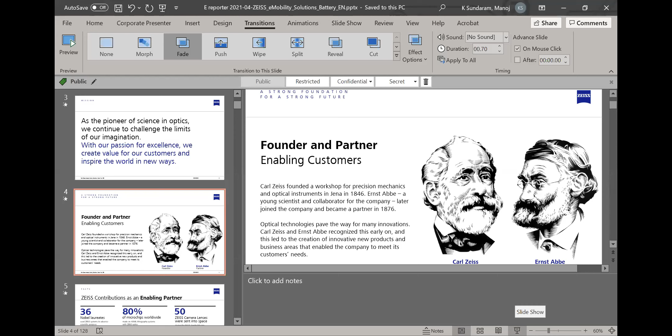Oh, it's not moving forward. Sorry, I do not know, it was working very fine in the start. Try once again, or you want to share the complete screen, or advanced or something. Manoj, you could also send across the presentation to us, to Priyakshi on WhatsApp, and I'll put it on for you and change the slides for you. Is it okay now? Yeah, okay, it's fine now.

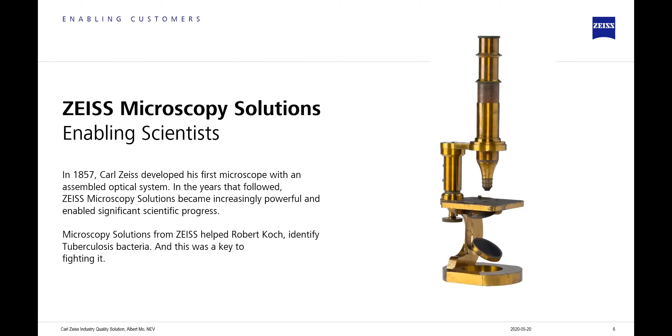We are an enabling partner to many renowned companies for many years. One shade of it is that 80% of the microchips, be it mobile phones or USB cards or anything, is made on Zeiss optics and Zeiss technology. One of the key inventions when tuberculosis bacteria was spreading around was this microscope, which is valid even today in corona times, and also for lithium battery solutions. A lot of innovators have used our tools to make their processes better and figure out new things.

We are a worldwide company, present in about 100 locations. Our headquarters is in Germany, and we are located in 50 countries. 13% of our revenue goes back into R&D, which is one reason we say we are at the leading edge of technology.

We are divided into 4 verticals. The vertical I belong to is industrial quality and research, and our solutions come out of this vertical. In India, we are about 22 years old as a direct subsidiary, and we have a manufacturing facility for eyeglasses, for CMMs, that is coordinate measuring machines, and we have an R&D facility also. We are about a 600-member company in India.

This is our office, headquartered in Bangalore. We cater to medical, industrial technology, microscopy, vision care, and sports optics.

This slide is one of the most important, I would say, a message to the audience here, the august audience from the lithium battery area. This is one of our competence centers in Bangalore, about a 10,000 square feet competence center with various technologies, which I will showcase in the next slides. All these technologies are available at Bangalore, Pune, Chennai, New Delhi, Coimbatore, and various locations where you can come and do a pay-per-use, walk in and use the machines on a payment basis depending on the technology. We can give you a lot of solutions for the battery components, very clearly linking with Mr. Chandrasekhar's presentation on the microstructure, chemical porosity, and so on.

Our presentation on the battery topic starts from the overview until battery tray production, but because of paucity of time, I will cover only a few topics. Our overview stems into two topics: one is battery material, the ones needed for R&D, which is recipe development, the most important phase in the battery. Then it moves on to production. Mr. Chandrasekhar covered raw material processing, electrode production, and cell assembly, so I will also move in that direction, starting with point number 4, raw material processing and making a cell. This will mostly be the topic that starts in India as the lithium battery discussion explodes.

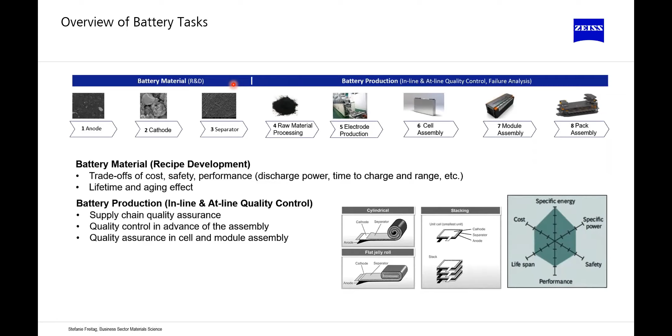So we will move forward to quality assurance solutions when you want to produce an electrode. Similar to the previous presentation, you have incoming goods, you blend them into a slurry, then coat and dry them, do a calendering process, and then cut the electrodes.

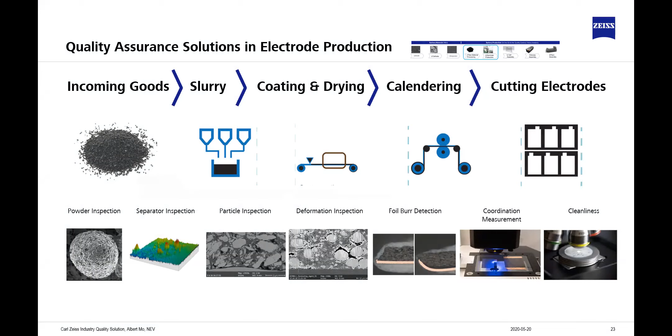In this process, you need to inspect, starting with the powder, separator, particle homogeneity, then understand the deformation, then the foil burr once you cut it, and also the dimensions. Starting with the process, we look at cleanliness, raw material inspection, checking the separator, which is a porous layer.

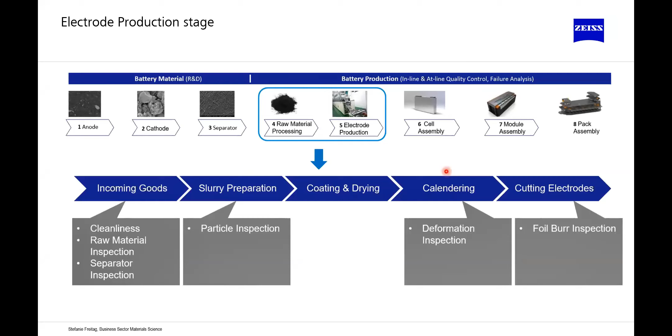In the slurry preparation, you look at the homogeneity. Then in the calendering function, you look at what kind of pressure to be applied and what kind of deformation happens in the electrode material you have pasted in. And then finally, you cut the electrodes.

So first is technical cleanliness. We do have a lot of solutions. We are a microscopy company. We have solutions starting with simple stereo microscopes used for identifying particles of around 20 microns, going up to identifying particles in the range of nanometers, few nanometers.

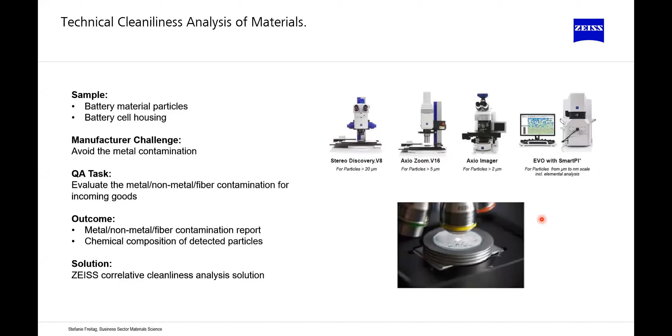So the major task here is actually to avoid metal contamination. You must check your incoming raw materials for singular metal and ensure no inclusions of non-metal or metal or fiber contamination in the incoming goods.

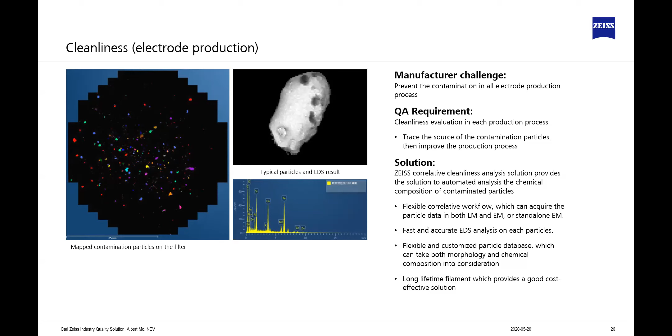We have complete cleanliness solutions. You can identify contamination either from the particle or from the prepared electrodes. You can check for contamination, identify them, look at where the contaminant is coming from, look at what metal is the contaminant, and then go back and see which manufacturing process might be inducing this metal into your process. So this is an important factor.

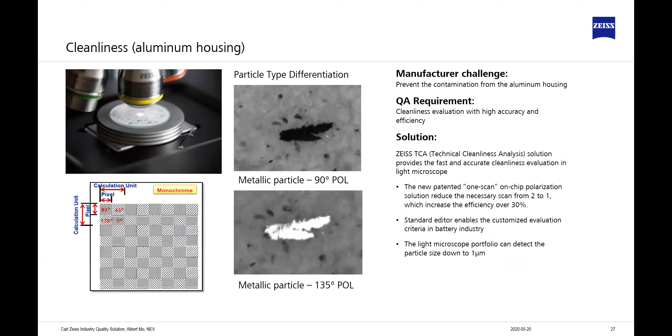Also, the housings are also important, where you have to check for cleanliness. There are procedures, ISO standards, which have been laid out, and our software follows it to the T. So you can be sure of getting the right solutions from us.

Raw material inspection, this topic was also touched upon in the previous presentation. That is nickel, cobalt, manganese 111 or 811. The technologies keep changing, so you must have a clear cathode raw material quality assurance process in place, for which you need a complete solution stream, glove box, vacuum box, and so on and so forth.

We have these solution spaces available. Even if you do not manufacture, we can give you the complete stream, complete flow of operation to check your raw material.

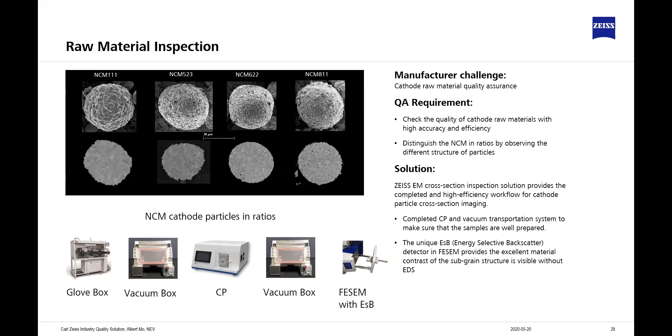Separator is again a polymer material, very important to understand to improve the performance. So the separator material requires a different treatment. It requires some electron microscopy to look at the microstructure. This is another role what we play.

We have different microscopes to look at the heights of the separator material and how it bonds with the PVDF material, which is another layer, a binder layer.

Slurry, as you make the slurry to coat, then you must understand how the powders are homogeneous without breaking the particles. You could do it in simple microscopes, or you might need the help of some electron microscopy. This is also available, and in some very high-end battery manufacturing companies, these things are automated, and our electron microscope could be automated to pick up the data, thereby controlling your process in a more effective way.

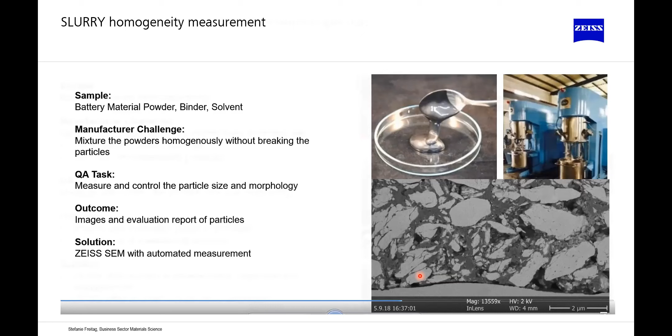Now, coming to calendering, that is once you pressurize the slurry on the aluminum or the copper foil and try to make it as thin as possible. In this case, you have to look at the homogeneity, the particle size, the morphology, and what kind of pressure you should apply.

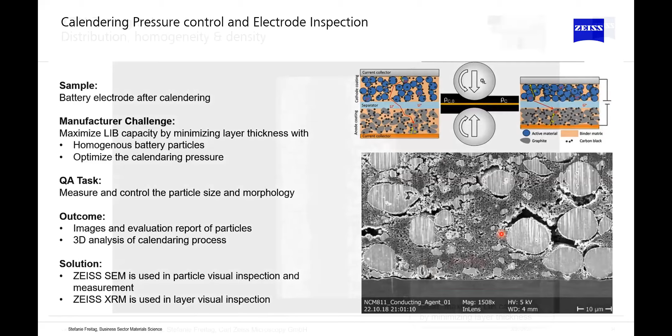So here again, we have solutions, Zeiss scanning electron microscope, or even XRM. There is another level of technique you can use. So you have two techniques we can use to tell you how good is your electrode. This is one of the technologies I just want to showcase.

You are now looking at two electrodes. One on the left is a highly compacted one. On the right is a semi-compacted one, depending on the pressure applied in the process.

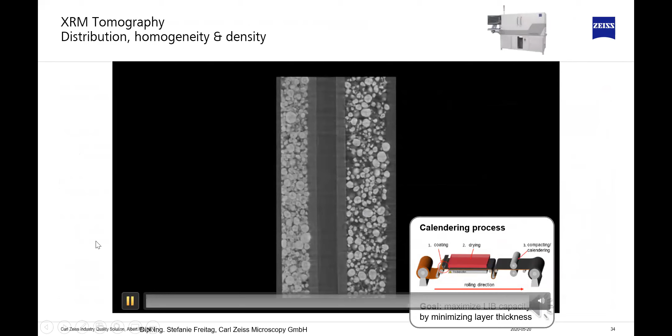Now, one of our machines, shown in the right top corner, can get into your electrode in detail, layer by layer, and you could understand how is the homogeneity of your material. Is there any foreign layer? Is the material compressed enough, or are there lots of voids and spaces? You could look at it.

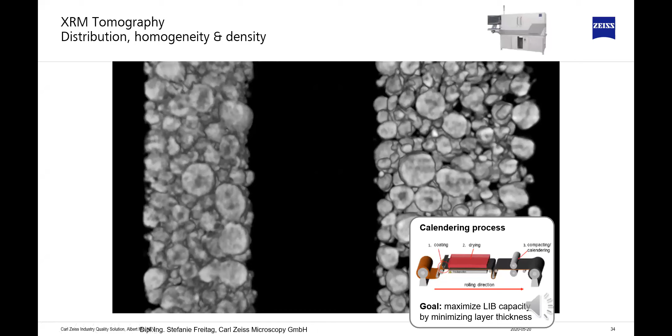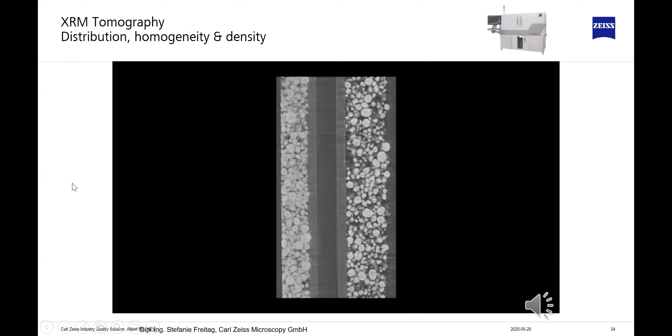This is actually amazing that you can go into the material and look, because this is an X-ray microscope. You X-ray the material and then you have an optical data collection. This is something which is very useful in the battery industry for taking a deep dive into the metals.

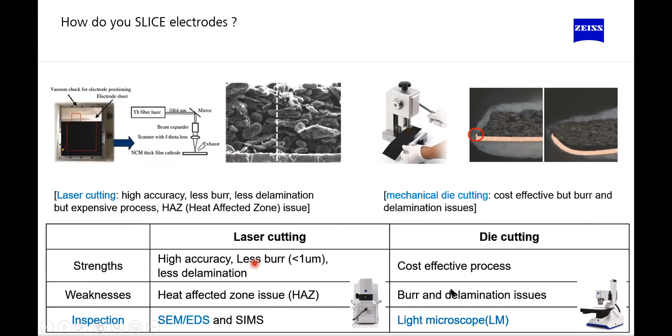Next, after you prepare it, then you have to slice it. You can slice it two ways: laser cutting or die cutting. Depending upon which technique you use, you have different microscopes to look at the end processes. You can use a very high-end electron microscope if you use laser cutting, or a light microscope.

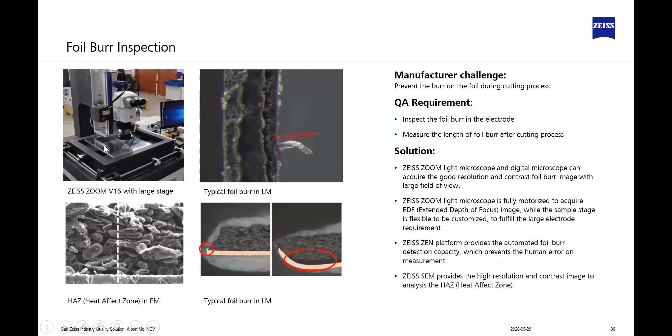We do have automatic solutions where our microscopes are put on large XY stages so that the complete layer of the electrode could be inspected for foil burr.

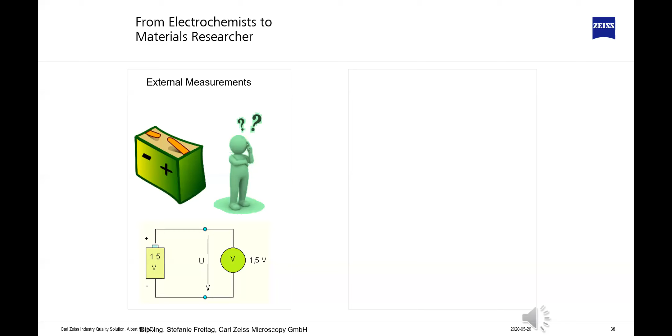So this was about the cell manufacturing process. Now you've assembled a cell, as was explained by Mr. Chandrasekhar. In the past, we were looking more at external measurements - the electrolysis, voltages, and current ratings and so on. Today, you would like to have a deep dive understanding of why the performance is good or bad, and the safety and recharge issues and so on.

So for this, once you make a cell, we have a beautiful novel technology called computed tomography. This is very similar to what is available in medical hospitals, where there is a CT scan. So this is a CT scan for industry, a 3D CT scan.

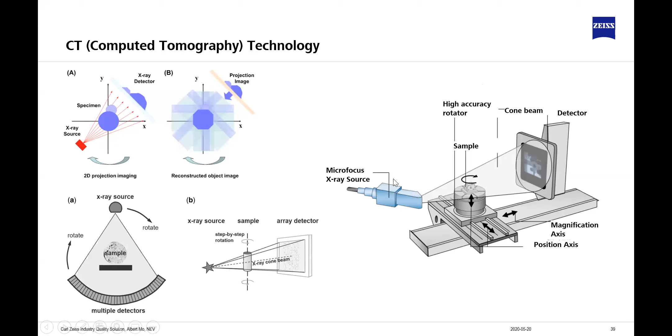So you have a source and a detector. You can put your battery, an 18650 battery, could be placed here. Then after about 30-40 minutes, depending on what you want, you would get a complete view of the battery material.

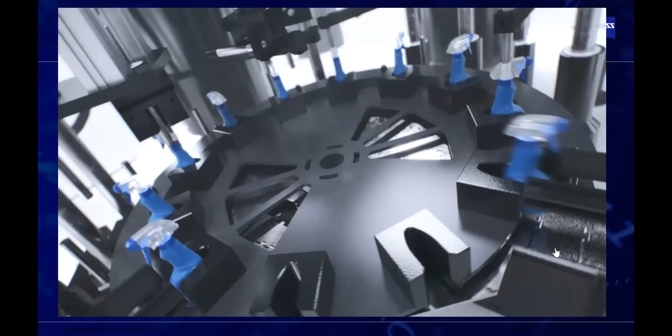So here I would like to show you a small video. In this video, we cannot show you a battery because of NDA and other regulations, so we are showing you a plastic component. But imagine this could be a battery in serial production - the same methodology is applicable.

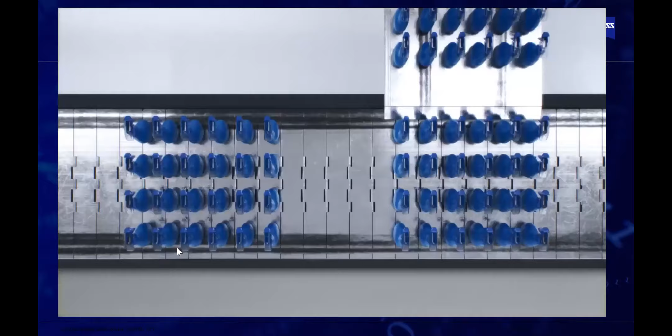In a serial production of batteries, if you would like to inspect a batch of batteries, you could inspect it from the outside - that's easily possible. But there are a lot of defects inside the battery. As explained in the previous process, there's a lot which happens inside the can - welding, tab welding, and so on. So there are a lot of internal defects which will remain hidden unless you inspect it and understand your process. X-raying your part is the only way to get the full picture.

And it is now easier. It's available in Bangalore, it's available in Pune, and it's going to be available in Chennai. So please come to us if you want to inspect your batteries.

We will put it inside a machine, a small machine which is available with us, an X-ray machine, which will go into the battery and detect - it's called Metrotom. It's a simplicity in CT. CT is computed tomography technology. So this would go deep inside your part. We will see in upcoming slides.

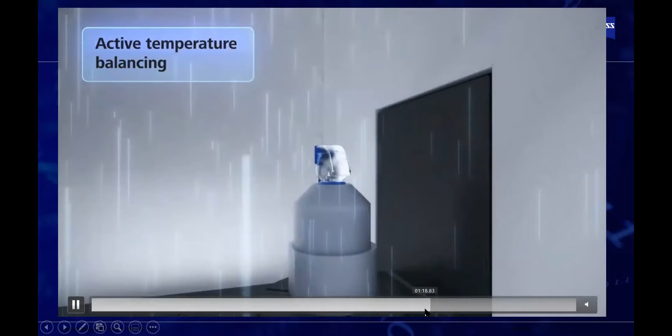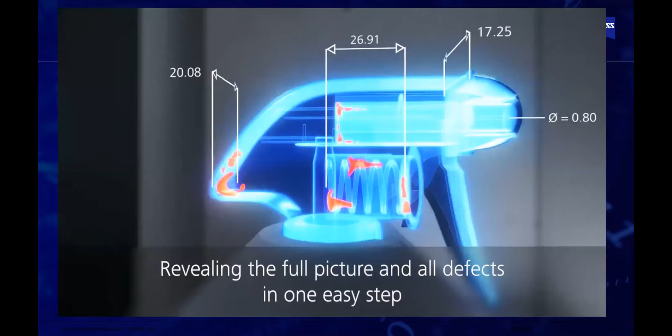You can measure inside the part. You can measure your cell structure. You can measure the wall thickness of the electrodes. You can measure used parts without dismantling them. It's a non-destructive test - a very interesting test, and many battery companies are using this technology.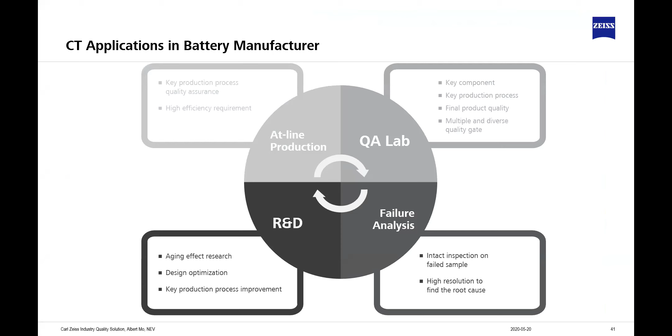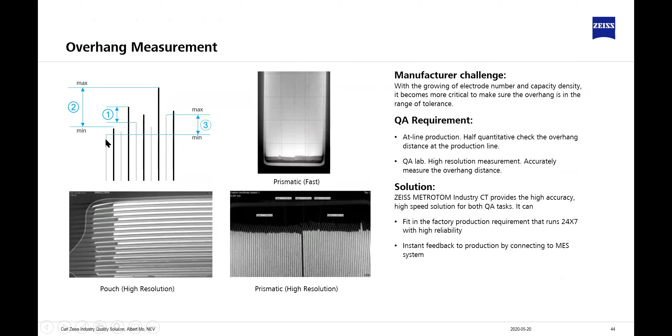Aluminum housing, if it is impinging on your electrodes, you could look at that. Tab and welding defects and glue inspection can be seen in detail, as mentioned here. You can measure the electrode to electrode heights, and measure the maximum to minimum heights, so you understand what's going on inside.

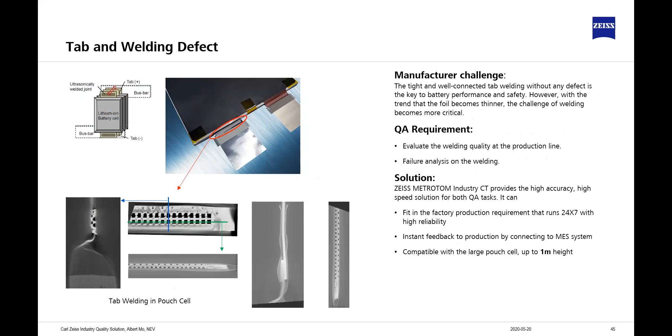Pouch cells again have a lot of tabs which come out and they are very fragile. The thickness of the tabs, the foil collectors, keeps getting reduced, and hence the welding is very important. The welding could go bad if the heat is more or less, so you must inspect the welding as a process, which you can do with our CT machine.

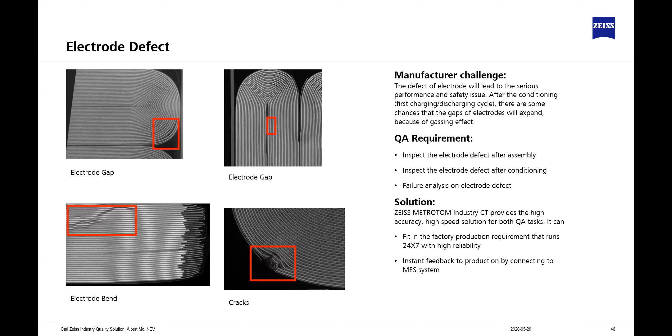Electrode defects. You have a canister, you have a battery, and you do not know why it is bad. So you want to put it in our machine, and you could find out that there is a crack in your jelly roll. This can be made out, and our engineers in Bangalore have done a lot of work for the battery companies. Please come talk to us and we could give you solutions.

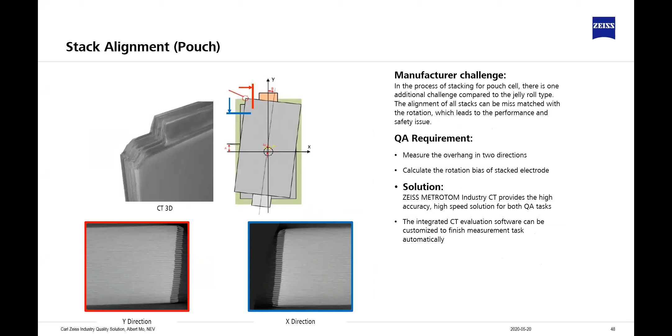Metal contamination, we discussed this. That's one of the major areas. In pouch cell stack alignments, the X, Y differences between the stack layers are important, which can be taken care of.

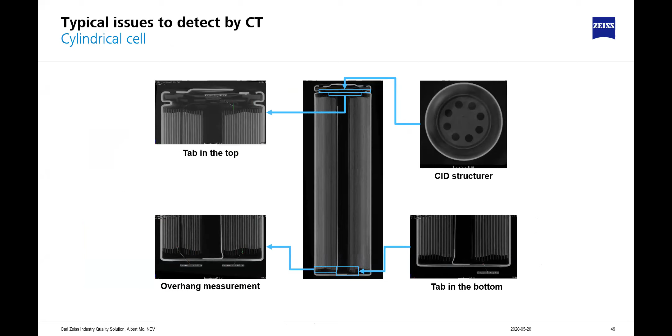Cylindrical cells, again, you can understand a lot by X-raying it and looking at it inside. I'm repeating, it's not an outside measurement. You're measuring inside the battery what's going on. You can look at it visually and also measure it.

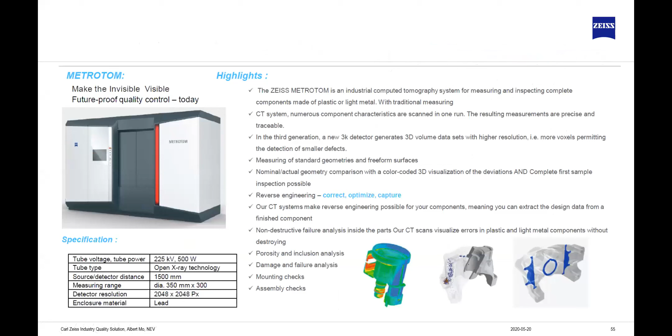Now I'll go back. After finishing electrode production, the quality topics around that, cell assembly and the topics around that, module assembly, I go back to battery material development. This is one of the major areas where we need to improve as a country.

Our experience at Zeiss, we have been in this field for a lot of years, and in the lithium battery area for about maybe 10 years or so. This whole presentation is a collage of our researchers who are sitting in China, Japan, Europe, Germany, and USA. So we have a lot of know-how.

We can help you with understanding and characterizing your material content, which will result in looking at your material structure, how the properties behave, how does the material behave, and finally what is your performance and how does your process work. So everything in a battery has to do with the microstructure.

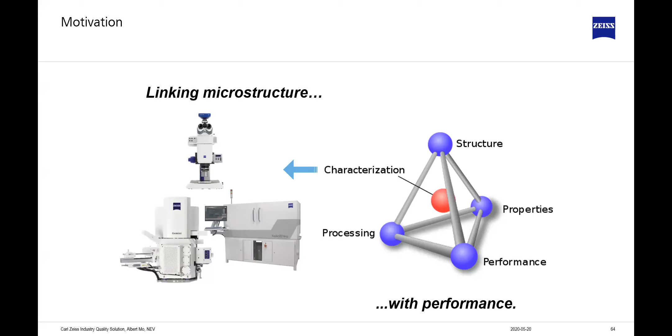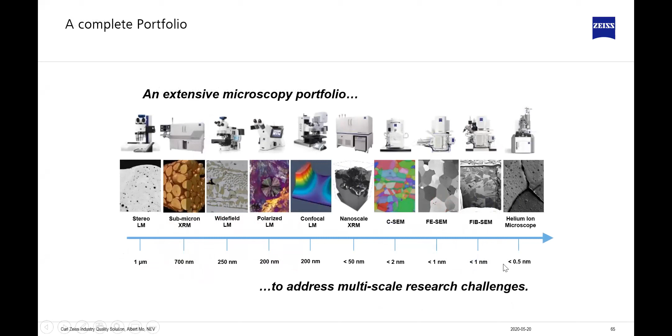So what we will do is, we now have an extensive microscopy portfolio, starting from a few microns of measurement down to a few nanometers, I repeat, a few nanometers. With this complete portfolio, we can understand the packaging, which we already saw, the assembly defects, the layer defects, and the porosity of the separator, going back to the particles.

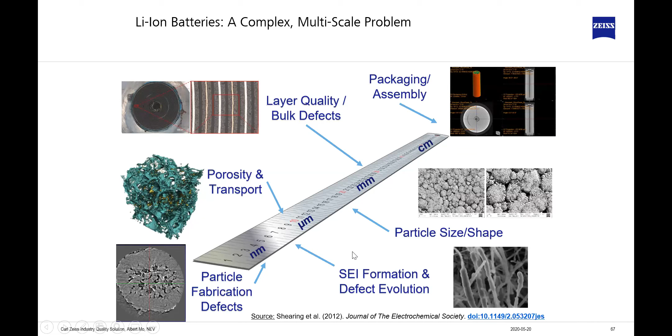We can look at the individual graphite particle. We could look at the SEI formation and see what is the thickness, and so on and so forth. We have a lot of tools to do it. Most of the tools you see here are available with us in India. That is the biggest part.

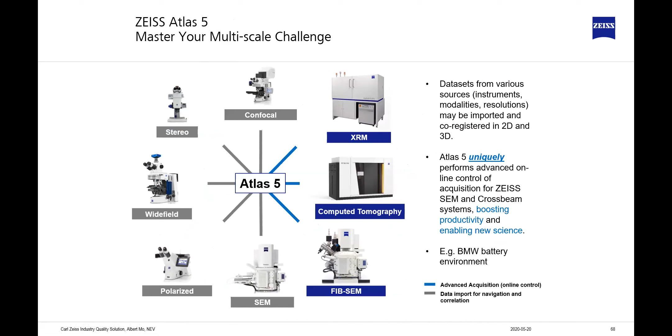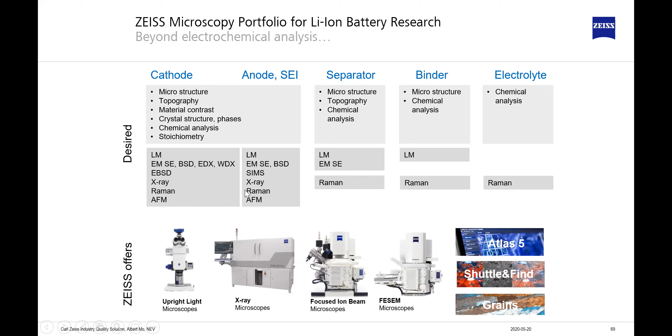Material contrast, then chemical analysis, and so on. What are the technologies? There are a lot of technologies used. We can explain all these things to you when we have our engineers together with us. Many technologies and many machines are available. We also provide you, as we discussed, a complete solution for how to handle lithium batteries.

Now we will talk about three topics: what you can do in a simple microscope, what you can do in an electron microscope, and what you can do in X-ray microscopy.

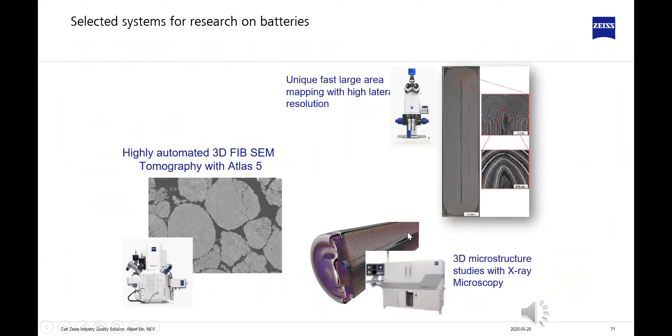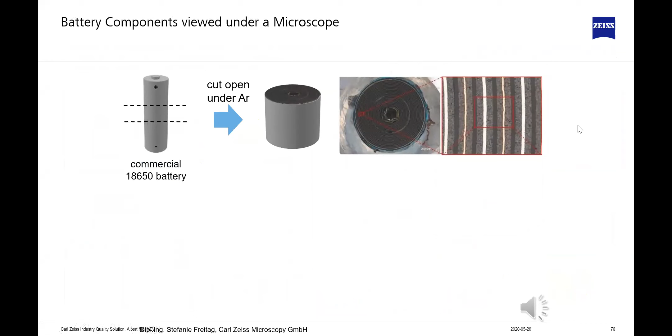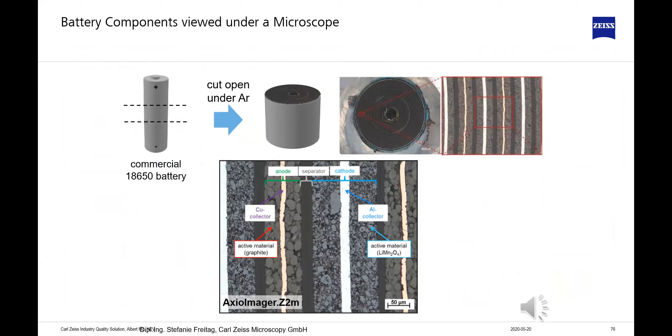In a simple microscope, you can cut open a battery and look at the layers. You will have to do a lot of polishing and processing work to prepare it for viewing. Then you can look at the individual layers: anode, cathode, separator, the copper and aluminum collectors, and the distances between them. This is another view showing how you can look at the layers.

So what can you find out? You can find out physical deformation and stress. This looks like a prismatic battery, so you can find deformation and stress in it. You can find if the particle size is not homogeneous, cracks, layer thickness, and short circuits. You can measure from a few microns and above.

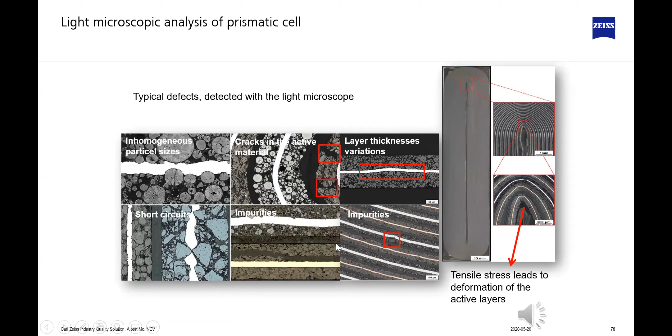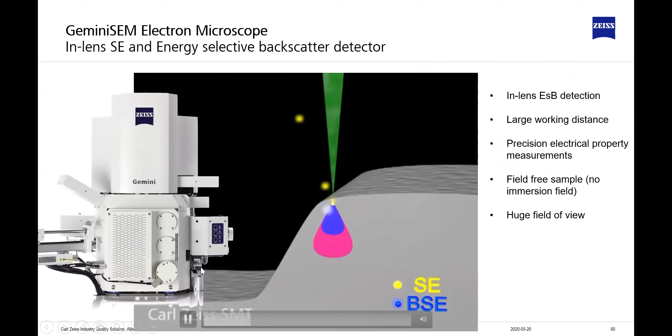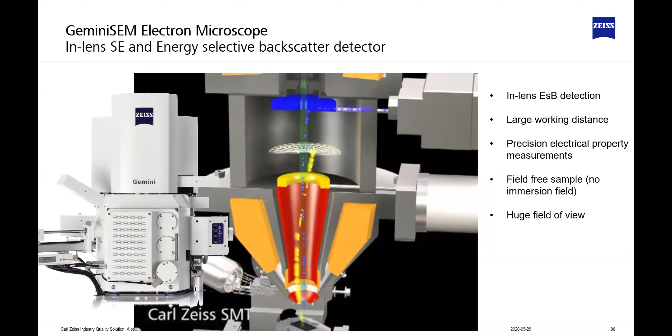Now going forward, if we use an electron microscope, what can you do? You take a small sample of the part, put it inside, and a stream of electrons impinges on the material. Then you get to know the microstructure of the material at a different scale altogether—we're talking about a few nanometers or tens of nanometers.

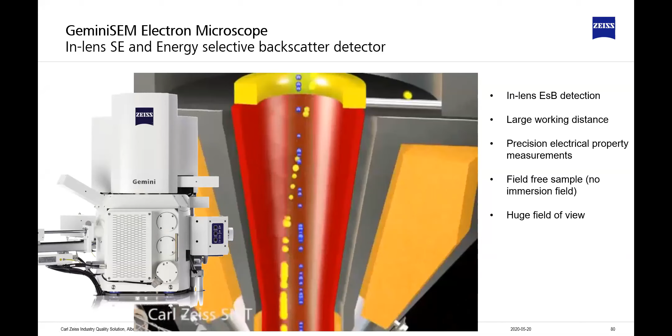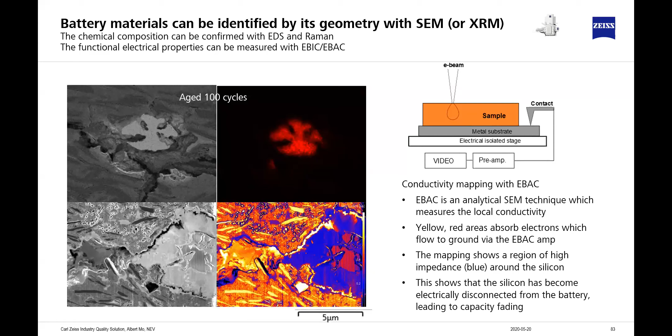This is an example of silicon, which is used in the graphite to improve the performance of the battery. You can look at the silicon and see how it swells after a few uses, so you can study the aging condition of the microstructure. After 100 or 200 cycles, what change happens? Which material changes, which material pushes what out? You can do all this in our electron microscope.

You can section it layer by layer and go deep inside. This is very important, and if India develops this kind of R&D, it would be very useful—otherwise we remain dependent on other countries for these developments.

Aging of the separator you can understand as a separate topic.

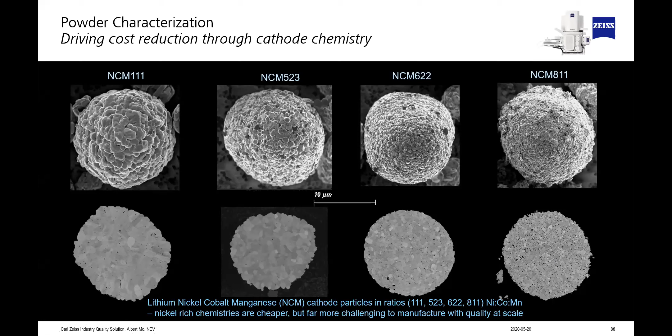So this is the level at which our machines can view the battery, from a particle to the complete battery or pack, or the complete cell. We can also view this with our technology.

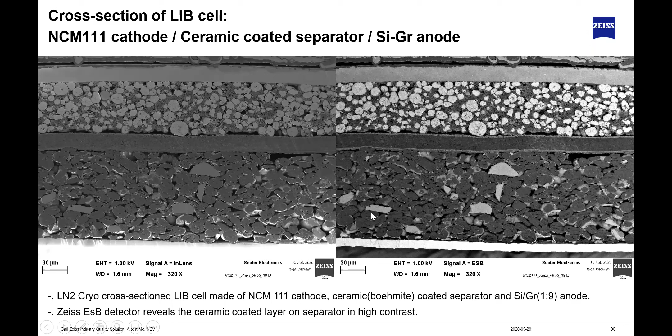You can view the polymer. To view this polymer, you need a very high-end, low-voltage technique, which is available with us. These are multiple views and images of a ceramic coated separator, and this is again an NCM 111 cathode, which is possible to view in our electron microscope.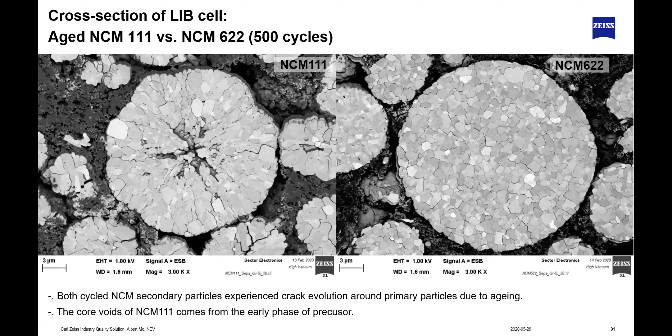Now assume you have made a battery and you want to view it without damaging it, going into the layers of it—we do have a technology for that. This is called Zeiss XRM, an X-ray microscope. The battery is put inside, and using this technology you can completely get the rendering of the battery as it is inside.

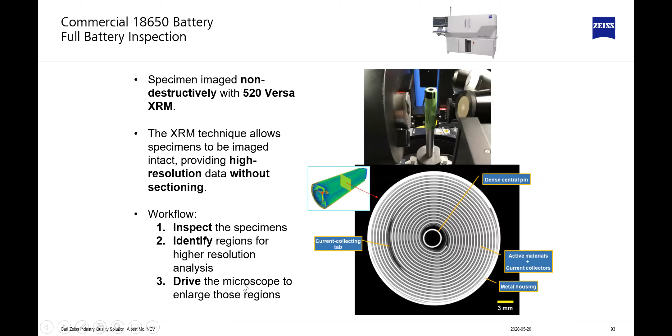So this is a physical rendering of it. I will show you a small video. What you can do is inspect the specimen of the battery, identify the regions which have issues, then analyze those regions separately. So this is what you would see.

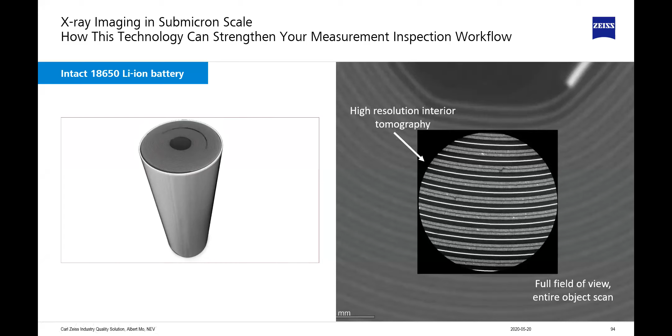If you can see the video on the left, that is a complete 18650 lithium-ion battery. You could go into it, you have the complete 3D structure. You can go into the battery, look at the individual anode, cathode separator layers, look for inclusions, cracks in them.

So this is fabulous, and this technology is available in India. As Mr. Chandrasekhar mentioned, we are related by our way of work to a lot of educational institutes who have this technology, and we can put them onto you, collaborate and support you in doing these things.

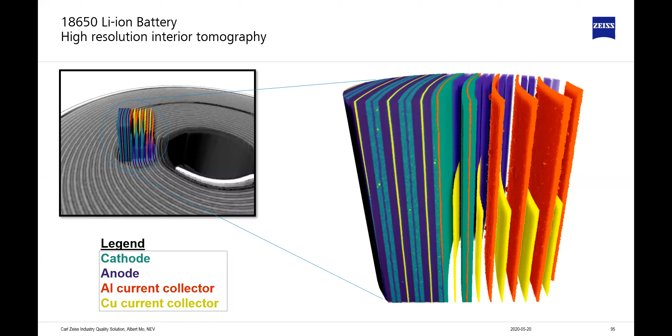This is a detailed analysis, about 500 by 500, 0.5 millimeters by 0.5 millimeter diameter. You look at it, then look at a small area in an electron microscope. This is the layer. Then you keep magnifying it, and go to a real fundamental secondary or primary particles and see how things are working.

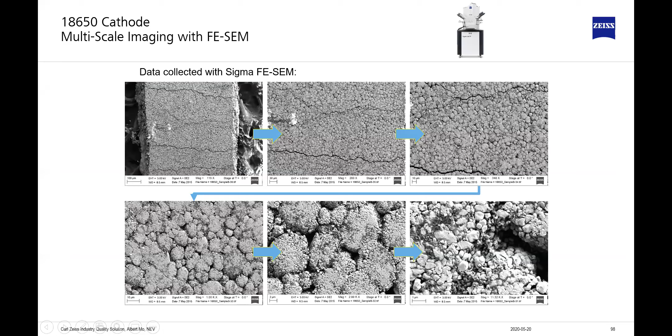And you can see a lot of cavities and spaces which do not add value to your battery performance. Coin cells, you can go inside and look at what's going on. Another view of the same machine.

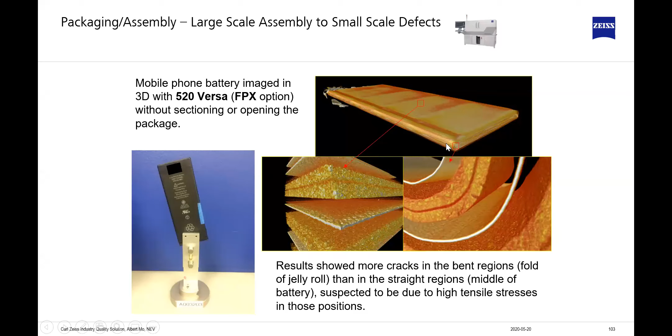This is called an X-ray microscopy machine. Another view of the pouch cells, what you can do by putting it inside the XRM. So you can see this is an example in a pouch cell. In the flat areas, things are fine. But when it comes to the areas where it is getting bent, you can see the cracks. Cracks mean low performance and failure of the battery.

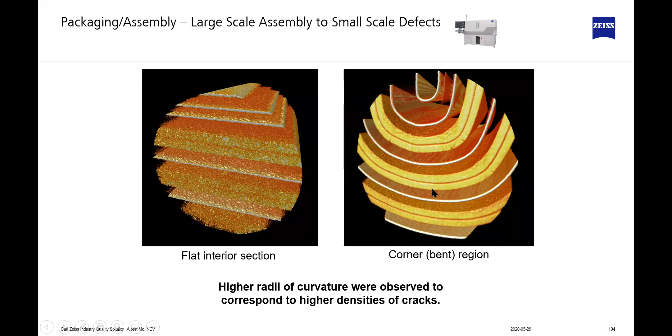Again, another view of it. So there are more cracks, less cracks, and it goes on. When there is more curvature, you do have a problem. So with this input, you can control your machine and change your form factor accordingly.

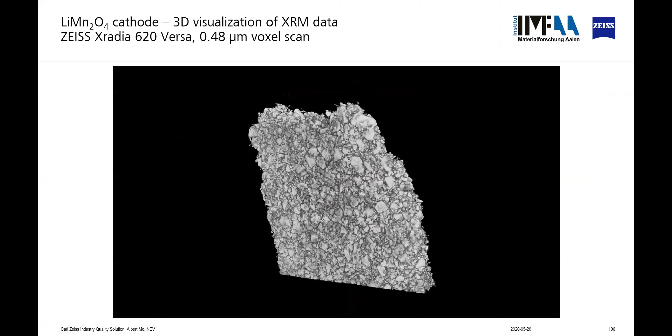Some more aging analysis, I will go forward. This is another view of just a cathode material. Going through the cathode material, they understand this material has a lot of small porosities and stuff inside, unwanted materials inside. Then they analyze which are the materials, which are the areas in which these materials are there.

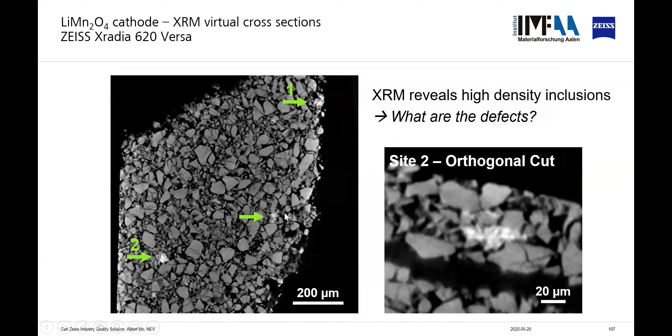Then that is taken to a different equipment, electron microscope, and studied. And then finally we understand what is the different material which has come in. This is called a lanthanum impurity, so this has come from a different process. Then you have to understand from your supplier where it is coming from.

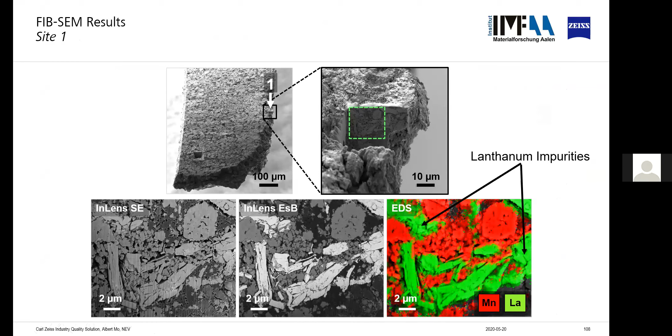So finally, what could we do? We could provide you with manufacturing quality solutions for the manufacturing process, then for the packaging process, different cells, we could provide you the packaging process. We saw that you can acquire information about your battery, segment it, analyze it in some software. We do have software to simulate new battery designs, new combinations, and see that you get the best battery required for your customer.

So this is what we started with, that we are into battery production, right from raw material to the pack assembly, and also into R&D for the recipe development. So we could give you a complete one-stop solution for all your quality solutions.

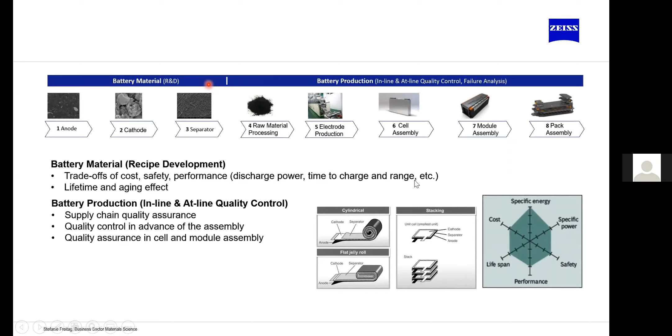Just one slide, what I have not added is if you're putting the battery onto a car for the OEMs, we do have solutions to see how the thermal is, you have a lot of structures for the thermal cooling and so many things around it. On the BMS, we do have solutions for the measurement of the electronic parts inside. So we have a complete solution right from material to putting the whole battery pack onto a car.